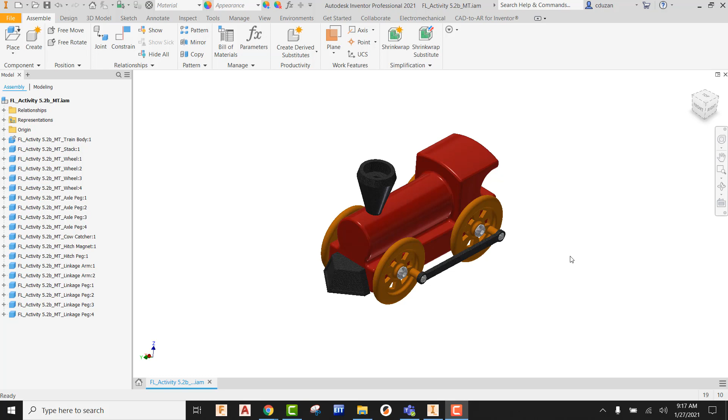So in order to do the IPN, what we have to do first is come up here, create a new file, go into your English, your standard templates, and come up with your standard inch IPN and go ahead and hit create.

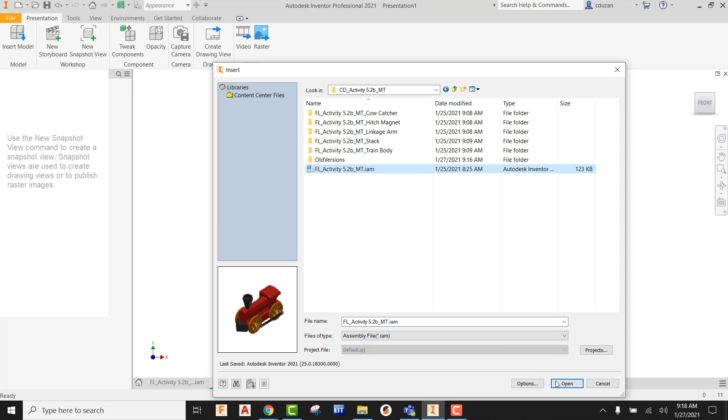Okay, it's now going to be asking you what assembly you want to bring in. So I'm going to come out here and go to my folder where everything is stored so far as my parts and my assembly goes. I'm going to be looking for my assembly and going ahead and opening that up.

All right, so one issue that we have that you're going to see here, my case, and this is a great learning thing. If we came out here and go to the home view, all right, this is what I'm seeing. And this is exactly the reason why you always ground your first part with your assembly.

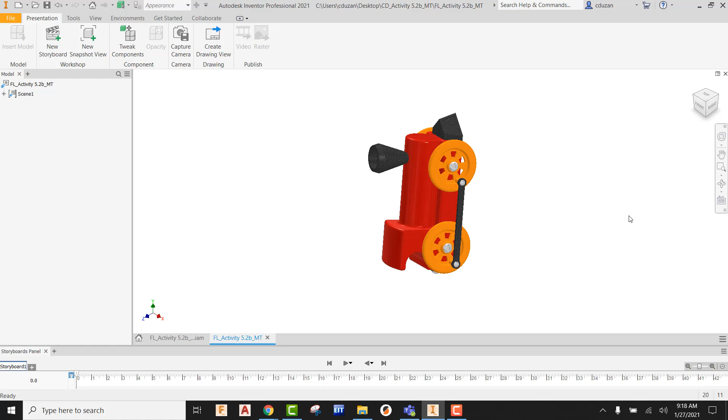So if you did need to come out here and fix this, here's how we could do it. All right, so I could come over here and use this icon at the bottom of the navigation bar. It's called Look At. And if we pick on Look At and we pick on a flat face on this, it's going to turn it plan where we can actually see what that view looks like.

Now that I have that, I can see it's not even oriented, okay, to the actual view cube. So what I can do is I can right click here on the home view and I can set the current view as front, and now that is sitting as the front view in my view cube as well as the front of my actual train.

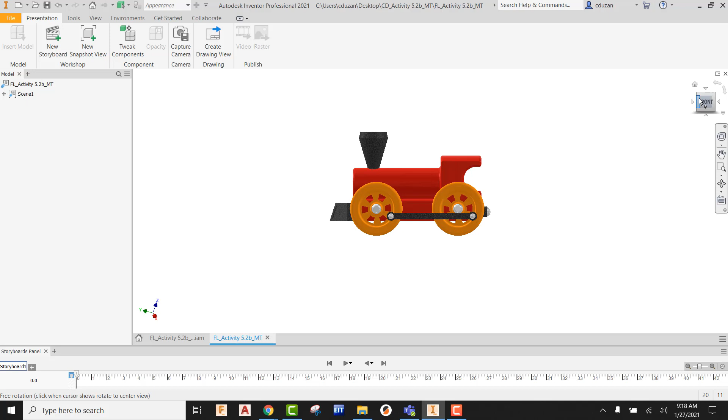Now I'm going to come up here, pick the top left-hand corner of the view cube. I'm now going to come up to the home view, right click on it, set the current view as home, and pick on fit the view. So now we have reoriented this to our front as well as our home.

Okay, so every time now I'm hitting the home icon, it's going to take me back to this view, and we need that in this case because when we're doing all the tweaking of components here in just a moment, we're always going to be referencing back to our home view.

All right, so now we're ready to get things started. So I'm going to come up here and go to tweak components. All right, and here's how easy it is.

Just think of it this way. The first parts that we're pulling off are going to be the last parts that are going in if we were to actually animate this.

All right, we don't have to just do one part at a time. We can do multiple parts. We can do sets of parts. It's really kind of up to what you want.

Just when you're doing this, just please remember, do not allow ghosting to happen. And what I'm talking about with ghosting is make sure we have parts that are not magically going through other parts. All right, we want to keep this as real as we can.

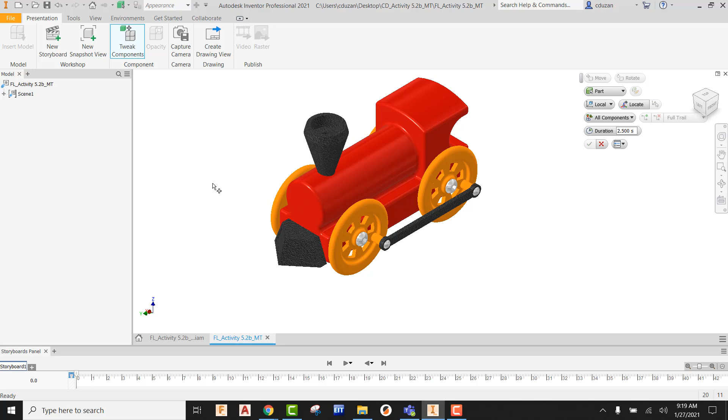All right, so in our first case, I'm going to come out here and pick on the linkage arm. And when I do that, I can see this triad shows up, and that's totally fine. But what I'm also going to do is I'm going to bring out an entire set.

So I'm going to hold down the control key, and I'm going to go ahead and pick the linkage peg. We can see the blue highlight is there. All right, and I'm also going to hold down the control key and pick on this linkage peg as well.

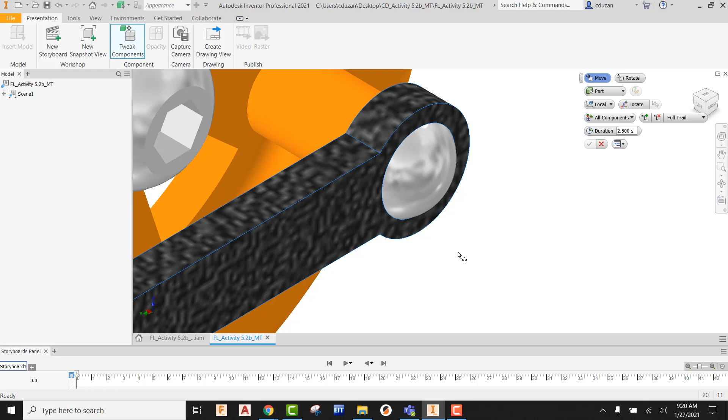All right, now what I'm going to do is come to one of these arrows on the triad, and I'm going to be determining which direction I want this to go. So I want these to come straight out. So I'm going to go ahead and pull these straight out. All right, now when I'm pulling these straight out, all right, there's two things that's happening.

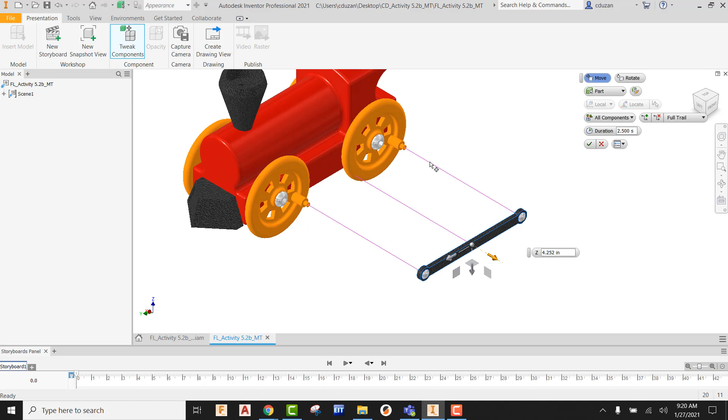First thing is I'm going to make sure this is always in the isometric view for the view cube. Second, I want to make sure to leave enough room where I can pull out these wheels and axle pegs, keeping a white background buffer area between the parts so everything is separated. I'm going to pull this out just a little bit and green check it.

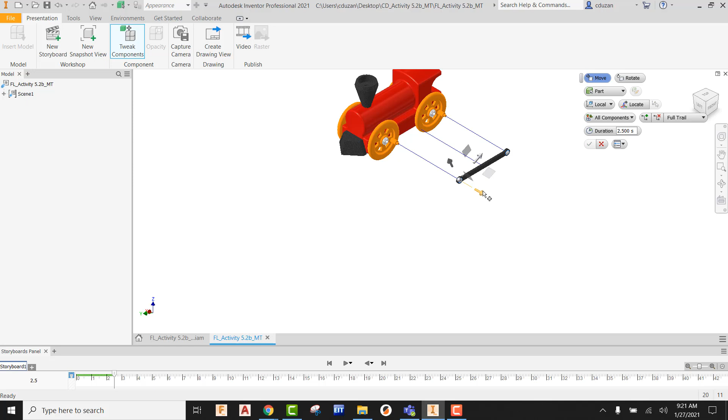I'm going to come back into tweak components, and this time pick on this linkage peg, hold down the control key and pick on this other linkage peg. Now I can grab the arrow and pull these out, keeping that buffer area between those parts. I'm going to green check it.

Now I'm going to come up to tweak components again. I'm going to pick on this axle, holding down the control key and picking this other axle, using the arrow to pull this out, keeping the buffer area between them.

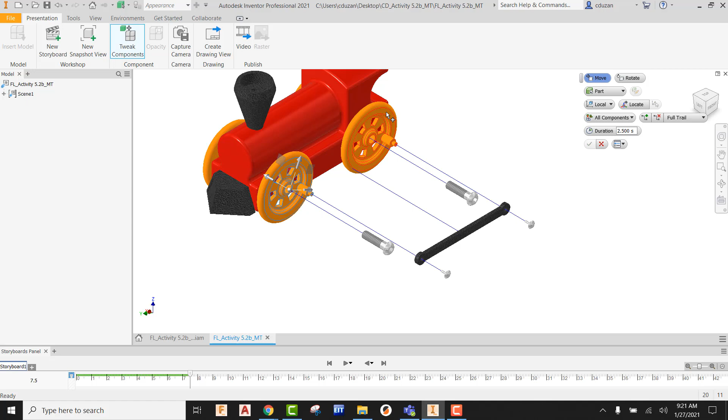Finally, tweak components one more time, pick on this wheel, hold down the control key, pick this other wheel, and grab this arrow to pull these out. Green checking it. Everything is still locked into the isometric view, and we have that buffer area around this. Now I can start tweaking my other components.

Tweak component, pick the cow catcher. I'm going to grab this arrow and pull this out, keeping that buffer area between it.

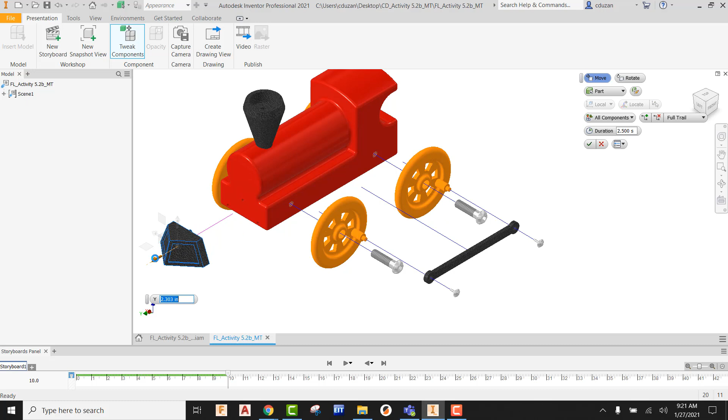Now I'm going to flip this over and use tweak components. I'm going to pick both the hitch magnet and the hitch peg, send this back into our home view, and now I can pull these out, keeping the buffer area there. I'm going to green check it.

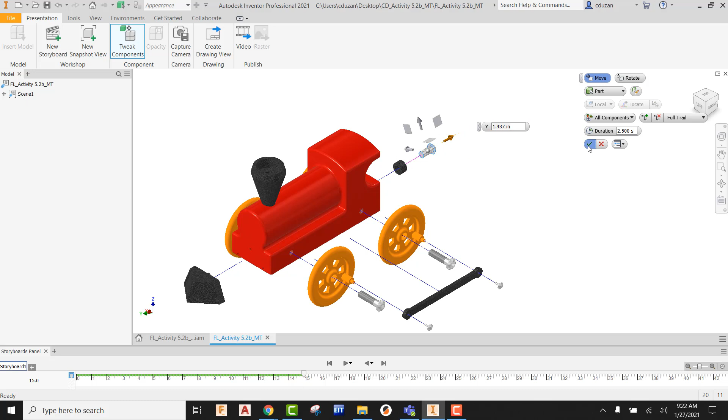Tweak components again, grabbing the hitch peg, and I'm going to pull this out, keeping the buffer area around that. Once again, we're still locked into the isometric view. All right, so we're good to go.

Tweaking components one more time, I'm going to grab the stack. I'm going to pull this way up because my wheel, my axle peg, linkage arm, and linkage peg all need to come in this area, so I need to leave some area right here. So I'm going to green check it.

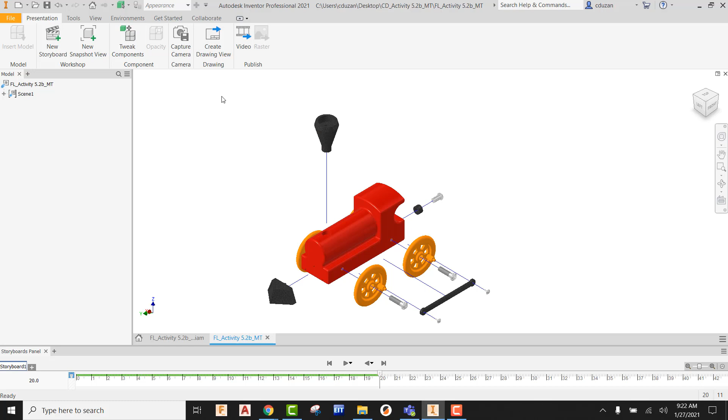Now I'm going to tweak components again, flip this over to the other side, and I'm going to be tackling my linkage peg, linkage arm, and linkage peg again. Sending this back into my home view, using the arrow on the triad and pulling this out, making sure I have enough room for the axle pegs and wheels. I'm going to green check it.

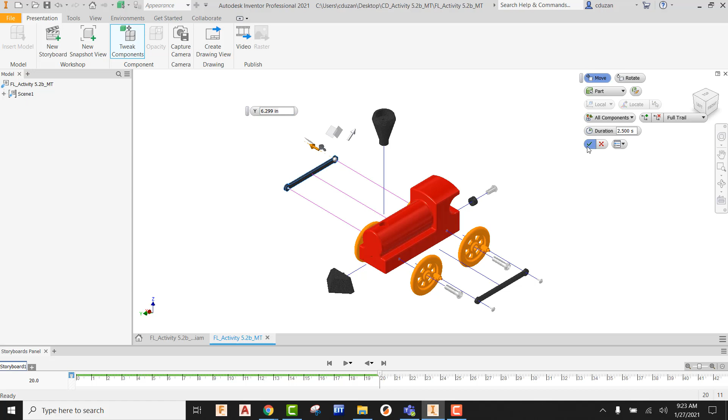Tweaking components again, I'm going to grab onto this linkage peg, holding the control key and grabbing this other linkage peg. Using the triad, I'm going to pull this out, leaving that buffer area around it. Once again, I'm back into the isometric view.

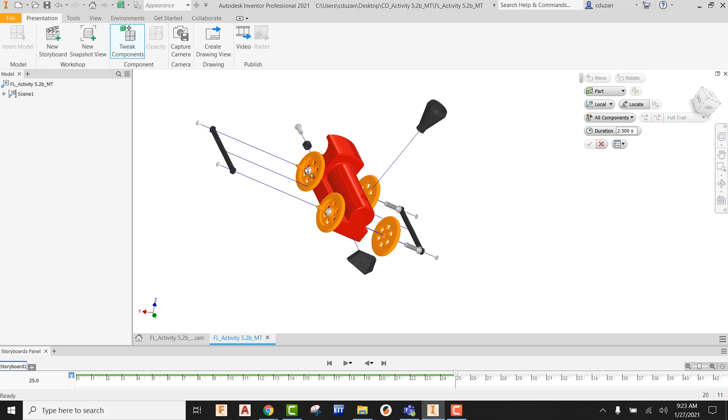All right, let's send this around, tweak components. I'm going to grab this entire set: the wheel holding the control key, grab this axle peg, holding control key, another axle peg, control key, and wheel. Send this back into the isometric view. Using my triad, I'm going to pull those out, where we can still see the wheels and keep the buffer area around it.

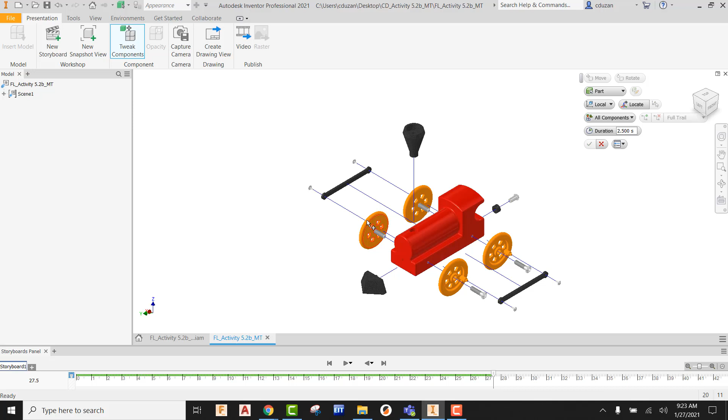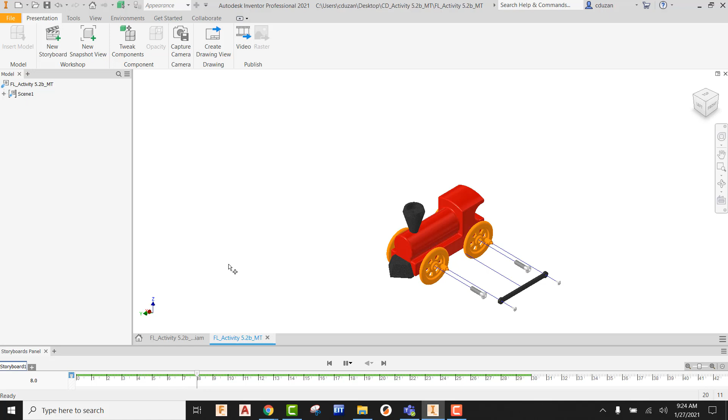You can kind of see a preview of what it is we've done. So I'm going to send this to the beginning and hit the play button. Now we're going to see how all these parts are going to be pulled off of this. Once again, there's no ghosting that's happening. Axle peg comes out, wheels come out. Now it's going to be the cow catcher coming out, the hitch magnet and the hitch peg.

Those are both going to separate. We have the stack coming up, linkage arm and pegs coming out. We're going to have our wheel, and then the axle pegs coming out of the wheel. So everything is completely and totally separated. Everything is looking really good.

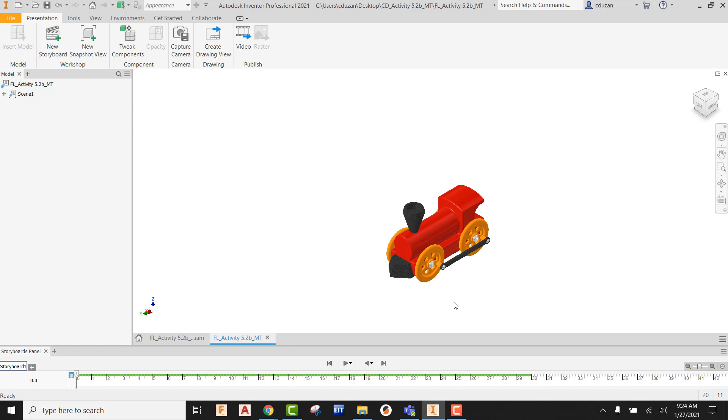So what I'm going to do is fast forward this all the way to the end, make sure everything is able to be here on the screen. And now what I'm going to come up and do is pick on New Snapshot View. So that has now been saved for me to use later on. Okay, so we have that view.

Okay, that's one part of it. So the second part of this is we actually want to create a video of this. So I'm going to come here and go to video, and I'm going to say I want to capture the current storyboard. The video resolution, I'm going to go ahead and crank up to 1920 by 1080.

And the file name on this one is going to be miniature train project disassembly. I'm now going to be telling it where I want to save. So I'm going to come out here and go into my train project folder. I'm going to go ahead and select that folder. And then my file format here is I have WMV or AVI. I'm going to go ahead and pick on AVI and say OK.

I'm going to do full frames uncompressed. I'm going to go ahead and say OK. So now it's going to start publishing that video, and it can take a little bit of time. Remember, it's having to basically render every single frame. I know these are going to be larger files, but they're going to look a lot nicer than the other codecs that we have available to us. So slight pause until this finishes up.

Okay, so that is finished up. I'm going to go ahead and say OK. I'm going to go ahead and minimize this and jump out. And I'm going to go into my miniature train project folder. And we should be seeing that animation. So that was disassembly, miniature train project, animation.

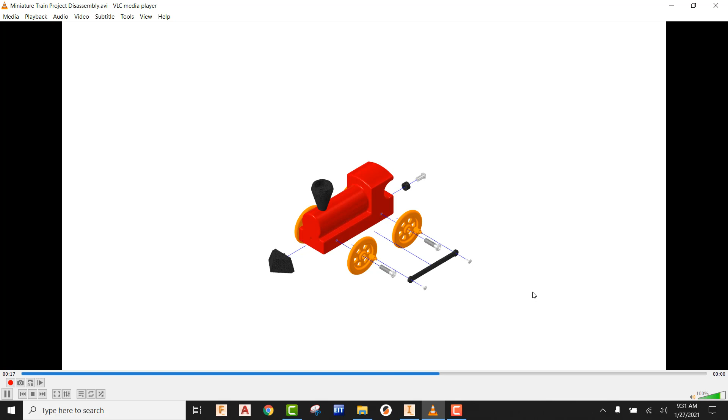So if we want to now go from the disassembly into an assembly, what we have to do is go ahead and close this down. I'm going to be going back into Inventor. I'm going to be creating the video. It's going to be the current storyboard, but in this case, we're going to say reverse.

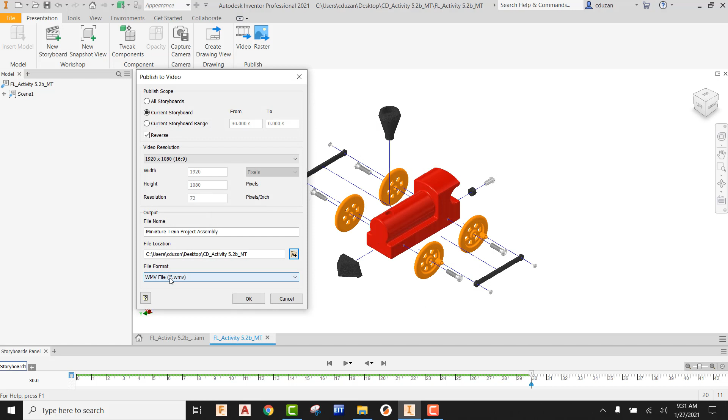Our window size, we're going to send it back down to 1920 by 1080. And our file name on this one is going to be miniature train project, and this time it's going to be assembly, making sure I talk to the correct folder. So I'm going to come out here and talk to the correct folder and say select it. It's going to be an AVI. I'm going to go ahead and say OK.

And now it's going to be full frames uncompressed like last time. I'm going to say OK, and it's going to go ahead and publish this. So just like last time, it's going to be a little bit of a pause, but we should be seeing that assembly showing up here in the folder. So slight pause again.

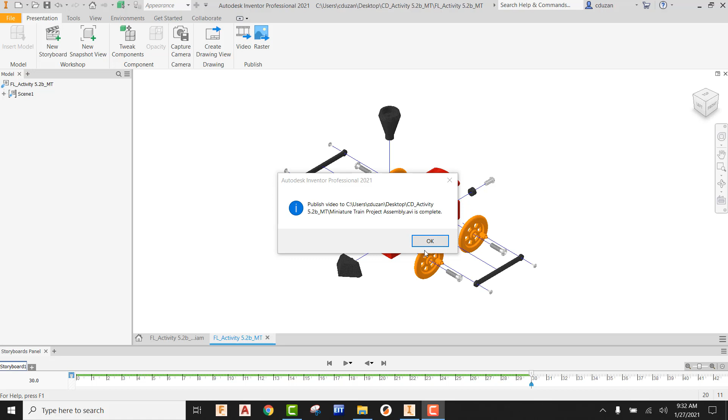Okay, so this is finishing up. It's going to be telling us that that has basically been complete, so we can say OK. And I'm going to go ahead and open up my VLC media player. I'm going to go ahead and open up the file, look into my miniature train project, and I should be seeing my assembly. So picking on the assembly, I'm going to say open that.

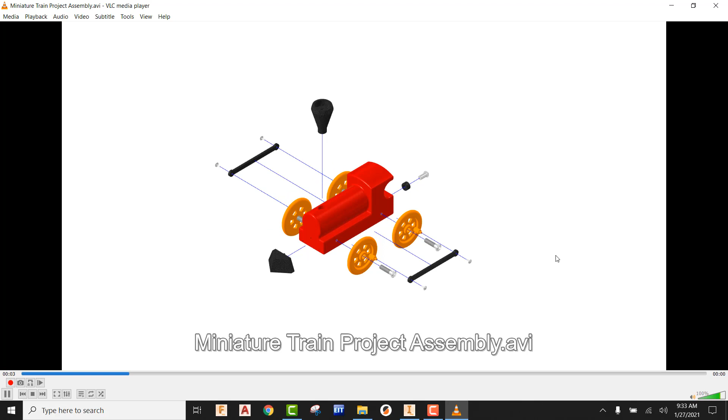I'm going to play it, and now it's going to be in the reverse order. So now it's showing us how to actually assemble our assembly.

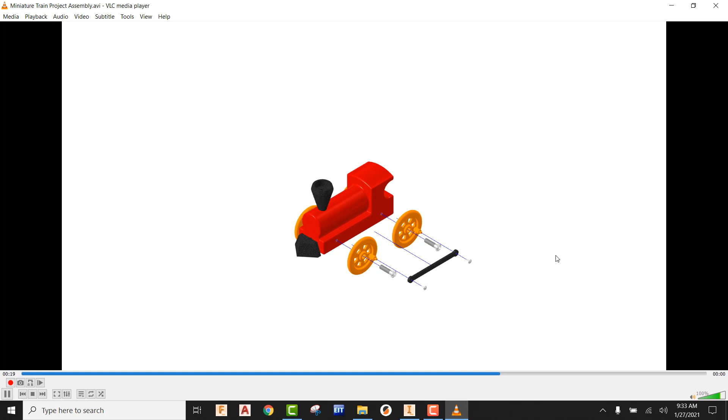All right, so those are the two videos you're going to need. You also have your snapshot view that you're going to be using within your IDW later. But that's really how to approach your IPN and how to tweak components and get everything to sort of work with you. And you're kind of good to go from there. All right, so good luck with that.